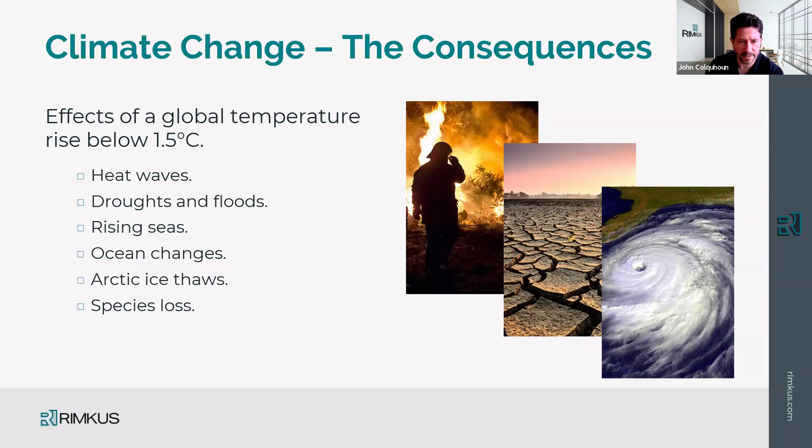Climate change and the global risks, really why we're here. We're looking at a global temperature rise below 1.5 degrees. That 1.5 we're trying to adhere to means we will still have heat waves, droughts and floods, rising seas, ocean changes, Arctic ice thaw, species loss - you name it, that's what you're talking about at 1.5 degrees. It's not that we stay where we're at currently; 1.5 is where the science says we're actually going to hit that tipping point into major events that will affect human life on Earth.

One of the main drivers to stop or slow that climate change down is that fossil fuels are to be eradicated from our supply chain - in domestic heating, industrial heating, transportation and all the rest of it. So we're moving away from that. We've all had the initiatives to go to electric vehicles, we're all looking at things like biomass plants as the sort of stuff we can do as consumers. To enable that transition, we're looking at more offshore and onshore wind, tidal and wave, biofuels, solar and PV, hydroelectric and nuclear as well - the UK announcing its small nuclear reactors last year.

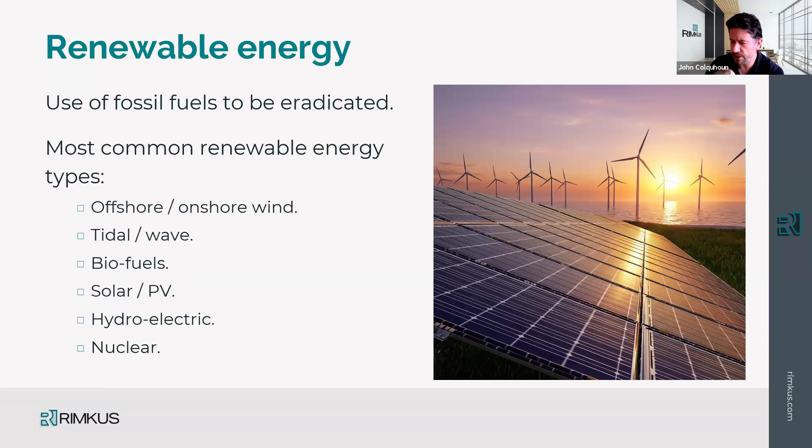Now, what actually is climate change? You're talking heat waves, you're talking expansion in power demand, both on the heat wave side and the flip to that. I don't know if any of you know that with climate change models, certainly for me in Scotland, the models say Scotland is going to get colder and damper, if that's possible. So really, it's not just a case of looking at heat waves, it's looking at how that's going to impact the environment that we live in.

Obviously, there's going to be ocean changes, so higher sea levels. So then you're looking at offshore wind turbine foundations. Do they need to cope with the greater water depths? Do they need to cope with higher winds, which then leads to higher wave conditions as well? And what do we do with those existing foundations? Do they need to be modified to future-proof those turbines across their 25, 30-year life? And if they get regenerated, can we still use those routes going forward?

Obviously, the blades and the masts as well. Again, reassessment on your wind speeds. Some of the cyclone damage that we've seen in certain regions in Asia - those turbines have been basically destroyed because we're having much more extreme events, much higher wind conditions. The problem is that's not helping with energy generation. It just means we have these one-off events that can come in and do catastrophic damage, and then the next month you have a doldrum of wind conditions.

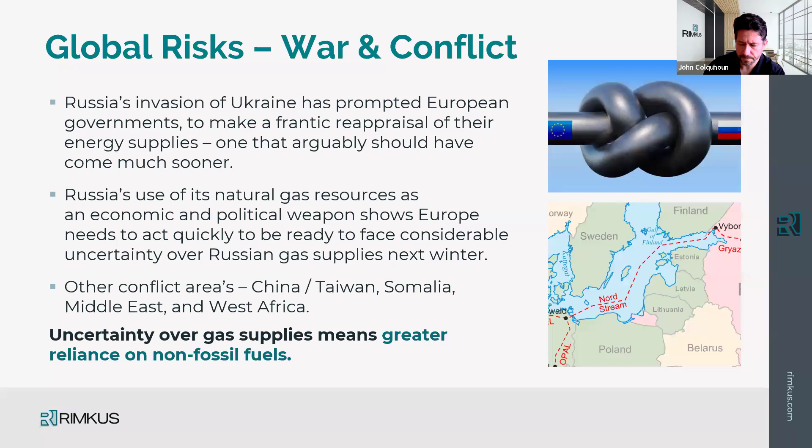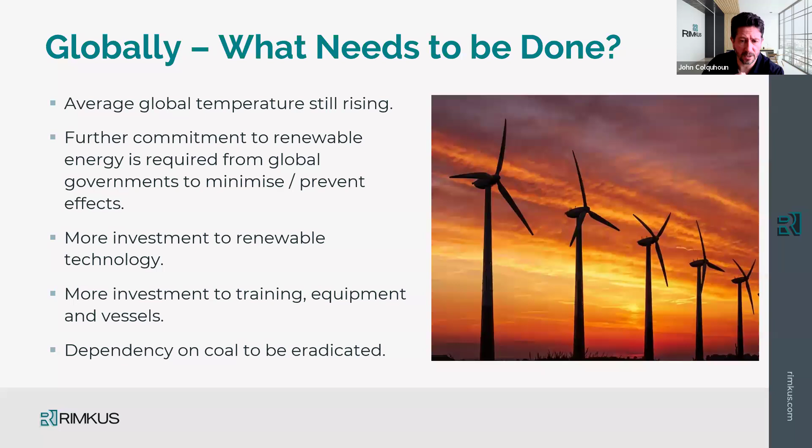Now, are the renewable energy targets realistic? I'm going to focus, since most people here are in Ireland, on what Scotland has been able to do within the framework of the UK. For example, in 2017, the UK was 7th out of 114 countries, but a major part of that is actually what Scotland's generated. Of that, it increased its renewable energy production by 26% from 2016. England increased with 14%, Wales 34%, Northern Ireland by 40% - they're coming from quite low bases. In Scotland, we've probably increased much more than that because we actually had quite a large base as it was in 2017.

Now, bearing in mind the Scottish population is a tenth of that of England, we are very lucky in that we've got a third of the landmass of Britain, which allows us to have a lot of empty spaces - let's leave it at that. What that does mean is that we predominantly rely on wind generation, whether offshore or onshore.

Solar isn't as much in Scotland, and it usually gets a bit of a laugh on this one, but actually there's terawatts worth of energy that's not being produced in Scotland because there's a natural presumption against solar and PV generation in Scotland, given our climate. But you have to remember that some of the sunniest places in the whole of the UK, probably the British Isles and in Ireland, are in Scotland, and yet there's a presumption against solar and PV installation. So that's got a lot of catching up to do within Scotland.

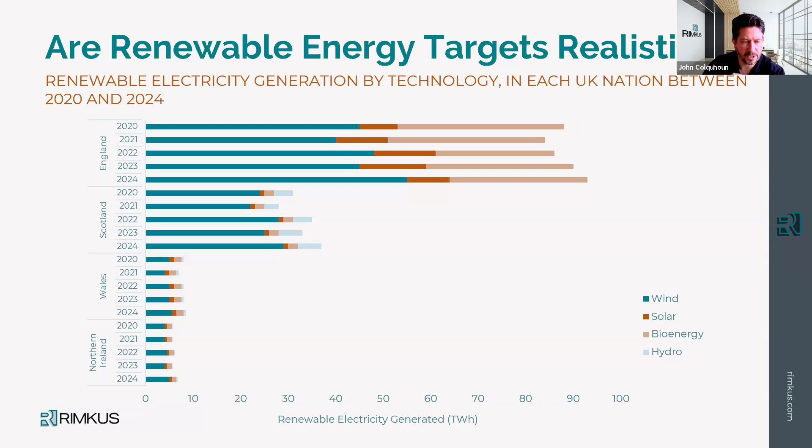We also have the luxury in Scotland of having quite a few hydro schemes as well. For example, Cruachan is one of those, and probably you'd class hydro along with wave generation and tidal generation as well, which is really three legs of the same aspect.

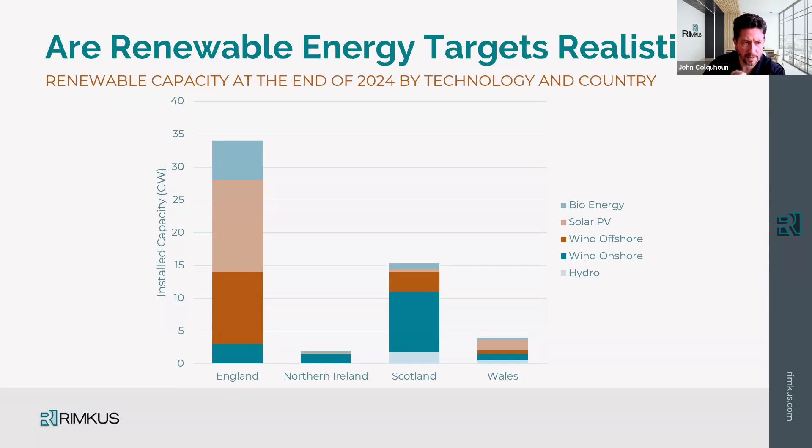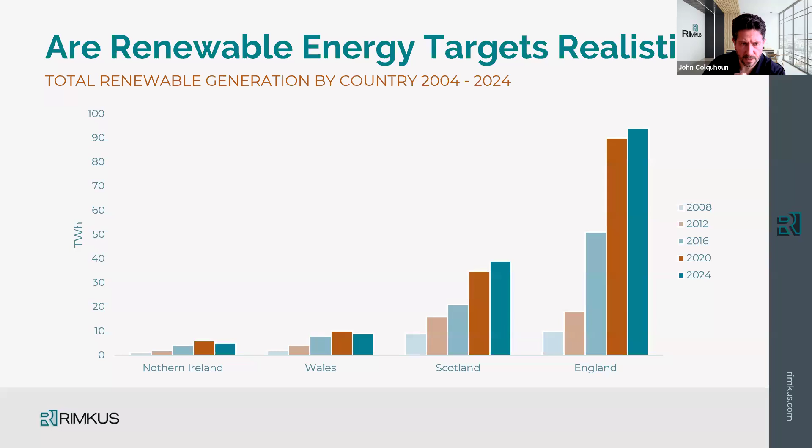Again, really just hammering home what the generation is and how it actually splits out between the years, where we've grown in the past and where we're going to. So really just a split, and probably don't see much difference here between Ireland and the British Isles.

Probably the one difference would be nuclear, which is obviously a multi-generational investment for the UK with the likes of Hinkley Point and some of the other generation we're actually doing. Those decisions should have been taken about 20 years ago, and they've really kind of lost the march on nuclear. But luckily enough, they've got a lot of wind and solar, and that's really taken up the bedrock where we've decarbonised with no more coal, and gas has been reduced slightly, but that gas production has to be reduced much further if we want to decarbonise our energy production.

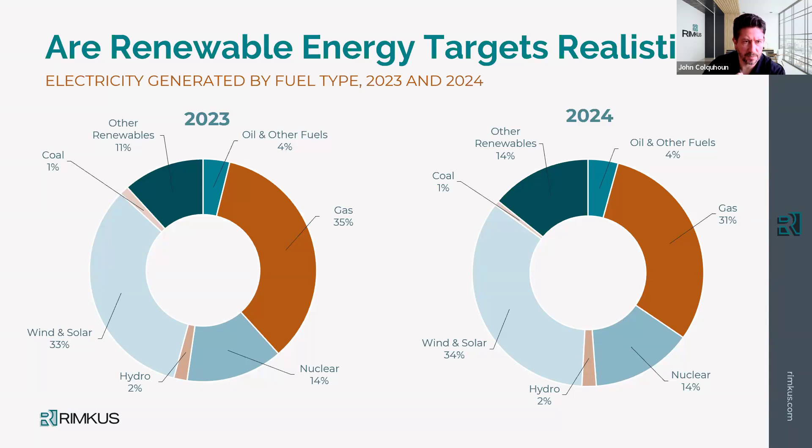So, to give you an idea, in 2000 Scotland produced 1.4 gigawatts of electricity capacity. By 2012, it was 12.3 gigawatts, so a tenfold increase in the amount of energy production.

Again, probably Ireland's very much the same. We're the bulwark for all the wind coming off the Atlantic Ocean. So I would say that probably onshore wind is going to be the major growth area within Ireland, given the next 5 or 10 years. Definitely, it has to be that.

So where that equates to is basically there's enough energy to power Scottish homes for 3 years. We overproduce our renewable energy and export that. Now, it was about 16 terawatt hours, slightly down from 2020, but again, looking back to global warming, you're looking at doldrums and some recorded low wind speeds as well. So where you have these storms that keep on coming in, they look great for generation, but sometimes or most of the time the winds are too high, the turbines shut down, so you're not actually generating any electricity through these high storm events. Then you go back into a period of doldrum after that. So again, the modelers are actually having to look back at what they're actually doing.

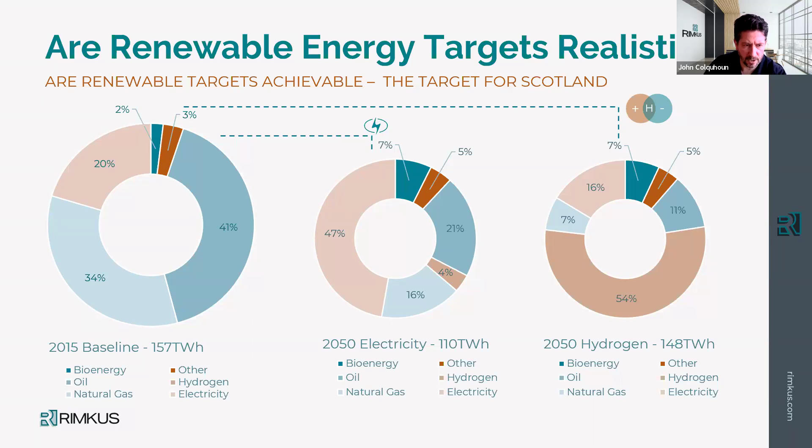So are they realistic? Well, yes, but they need the political and social will. There's a lot of pushback on things like wind turbines. If the community isn't taken along with that, again, social and political gives you the funding and it gives you the behaviour - how you interact with the community. They basically have these wind turbines in their foresight, in their mind, that they can see them, but they might not necessarily get the benefit from it.

And hydrogen, it's a bit of a phoenix - it kind of comes up and down depending on whether we can do it or not. I love the one I've seen, solar glass, which has been developed to essentially replace the windows in your house or in buildings, and it's still a PV panel or solar panel essentially in your property, but it doesn't have that visual impact of a big panel on your roof.

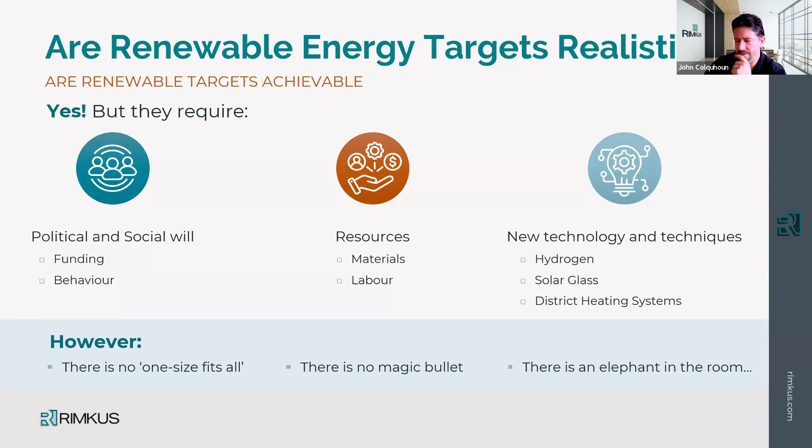But there's one I haven't talked about: is nuclear classed as a renewable energy? I've seen people trying to argue this one, and I've seen people being cute - they're calling it a low carbon energy. So they're classing everything now as low carbon rather than renewable, because nuclear material is a finite resource. We've got about 100 years left of identified uranium deposits that we know of and can harvest. So nuclear power isn't a renewable energy, but it kind of gets lumped into low carbon.

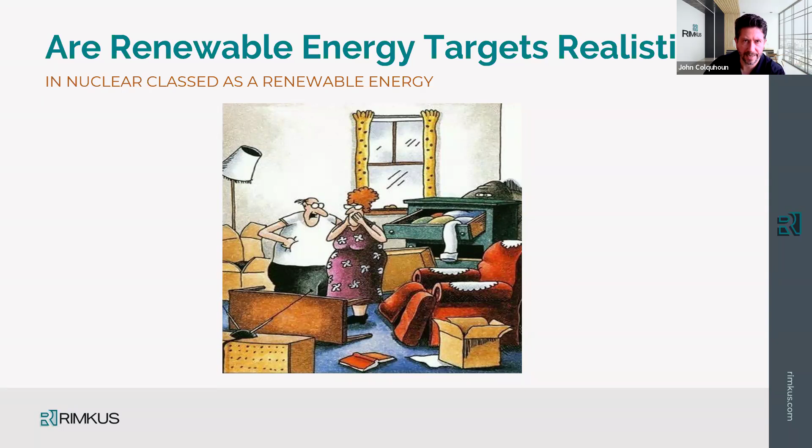And then the holy grail, which is nuclear fusion. Fusion, 40 years ago, was saying it's 40 years away. It's now about 20 years away, but they keep on going. The only thing with fusion at the moment is they can do it, it just takes more energy than it gets out. So once they crack that, that is basically the holy grail, because it's infinite energy.

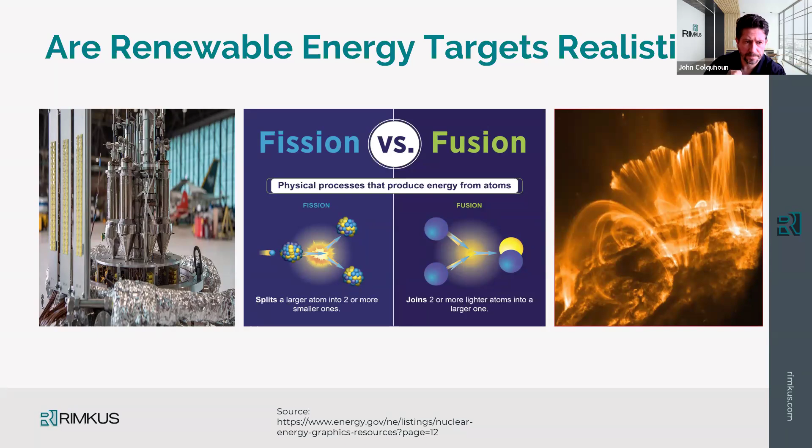So how does that affect offshore wind energy?

So wrapping all this global energy, wrapping all this supply chain, wrapping all the effects and potential going forward of what we're looking at here.

First one is obviously design practices need to change. We've got recognised standard bodies and organisations that produce codes, but I think they really have to start looking back and checking, is the 300-year storm actually a 300-year storm? Or is it now a 100-year storm? And is your 100-year storm a 10-year storm? There's that constant evaluation of what wind speeds, what wave heights, and any of the other aspects we're looking at. I think it really has to be reevaluated.

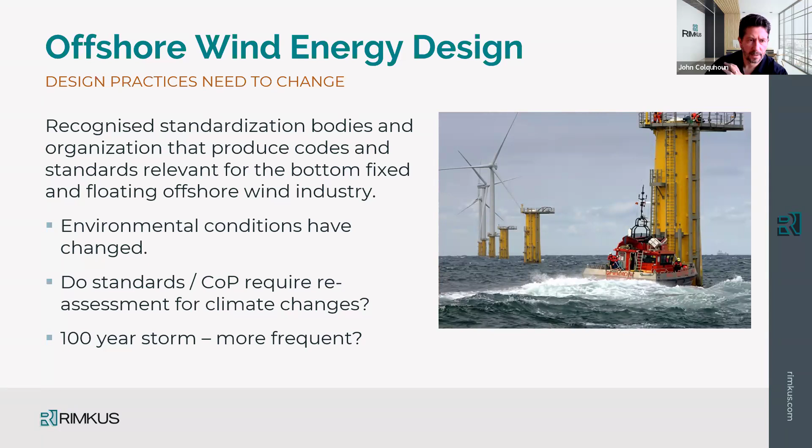Layouts - do we lay out the wind farm, the turbines, so that we can withstand the windstorm? You're talking here, we're looking at 20, 25 years. Beyond that, even if we repower them, is the site location the best location if we're looking over that length of period?

Are we looking at turbines? We're now going to 15 megawatt turbines. They are huge. You might need less turbines, but every time one turbine goes down, it's a much bigger hit on your generation and power produced. So you're putting more eggs into the same basket. Is that the best idea, or is it better having smaller turbines but more of them? Again, it goes back to what suits your environment, what suits what you're actually wanting to do. No size fits all.

And then you're looking at how do you build them. What's the power? What's the thrust from it? What's the rating? What do you do to control it? How do you shut it down? Do you get the most out of it? Can you operate these wind turbines at higher wind speeds? Do they actually operate at lower wind speeds as well? Those doldrums that occur - are we getting better at actually capturing all that wind, all that energy, at the same time?

Now you're looking at the content of materials. I've seen some ideas of the materials for the blades changing back to wood - they used to be made out of balsa. Going back to older materials to see whether we can have a look at those, because it might not necessarily be best for the environment using GRP. But then somebody comes along and fixes that, saying we've got a product here that we can repurpose and reuse. Do you have the blades leading the nacelle or behind the nacelle, depending on which way it turns into the wind conditions? All these sort of things are driving the design and driving innovations that we really need to be looking at now for that 20 to 30 year resilience.

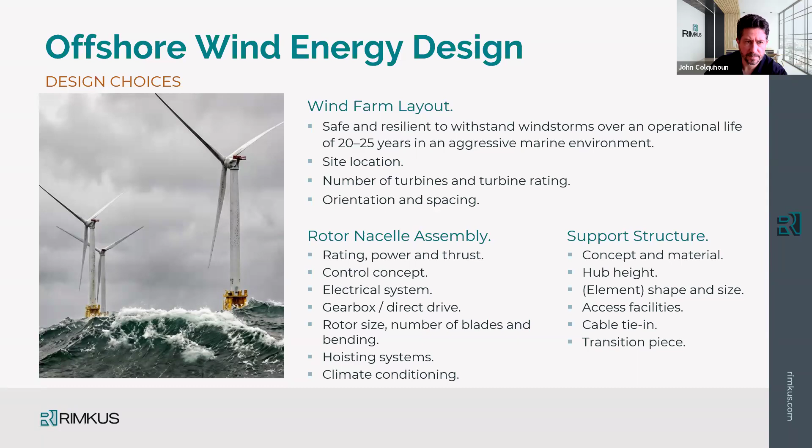Some of the biggest and probably most costly failures we've seen are damage to undersea cables. So you're looking at scour protection, the concept and materials you're using, the shapes and sizes of what you're actually doing. The structures, the met masts - do these affect other aspects of your wind farm? What routes for undersea cables might have made sense 5 years ago? Do we have to reassess those on shifting sands and the seabed? Are we looking at AC or DC generation depending on which type of wind turbine and how far it is? The cable protection...

How you weigh them down. Do you have to worry about terrorism? Do you have to worry about state-sponsored terrorism? Or is it just a case of cable dragging from vessels, normal vessels or fishing vessels, things like that as well that could potentially damage cables? How do we look at those and how do we minimize those?

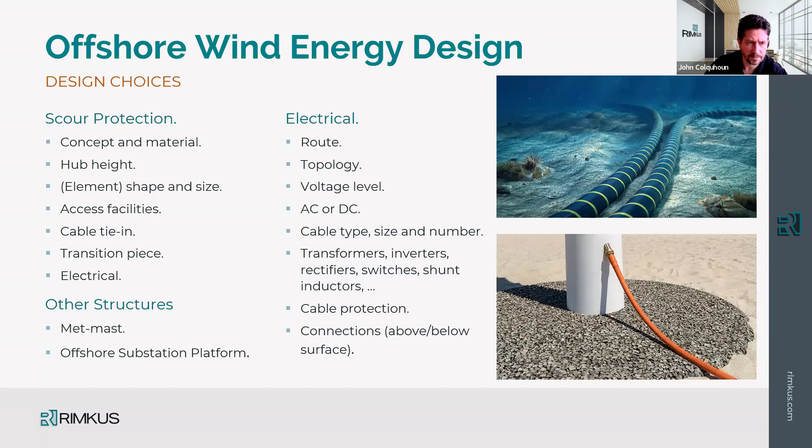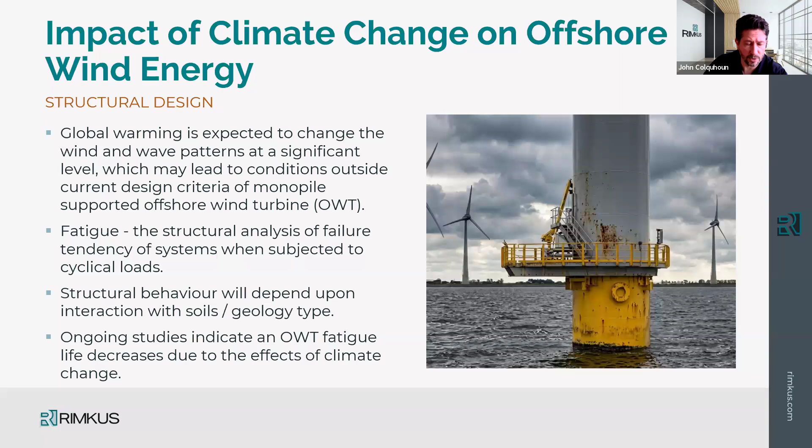Again, do you need to actually increase your PPM, your visits to site, your assessments? When you're ultrasounding things as well, making sure that the erosion or corrosion you've actually got is in line with what you expect.

But what we find, looking at it, the models are suggesting that wind speeds will decrease as a result of climate change. But the converse flip to that is it will increase extreme weather events. There's also going to be changes in wind patterns and tidal patterns, and a rise in sea levels.

One of the ones I look at is the Labrador conveyor. If you dump a whole lot of fresh water into the top of the Labrador conveyor, it essentially switches that off. That then potentially affects the Gulf Stream, which warms up Ireland and Scotland primarily in the colder weather. So is that going to affect and increase our conditions so we get colder, wetter, snowier conditions? Do they have to be accounted for in the potential case that happens, which, believe it or not, has happened in the past?

That's why we think of Charles Dickens and a white Christmas, basically A Christmas Carol - that was at a time when they think there was a slight hiccup in either the Gulf Stream or the Labrador conveyor, which resulted in a mini kind of ice age in the UK. That's how we get all these preconceptions, but it has happened in the past.

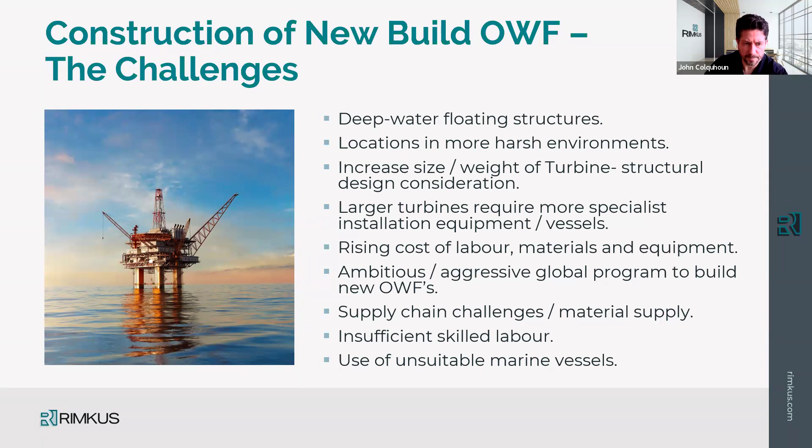We also have quite a lot of wind turbines reaching the end of their 20 to 30 year lifespan. We've extended some, we've rebladed them, and we're still going through that process. There was a wind farm, a couple of years ago, that underwent regeneration in Scotland - an onshore wind farm. Essentially, we're able to do much more generation through fewer turbines now. These are considerations that are out there as well.

The other one I'd mention is, if you have a wind turbine that fails and has to be replaced, getting a direct replacement can be near impossible. What used to be a standard 5 megawatt turbine, you can't get for love nor money now. The smallest you might be able to get is an 8 megawatt, but the problem is that for planning purposes, that's a material change to the size of the turbine. Therefore you might have to go back through all your planning consent with communities, etc. So that's a major consideration - whether you can actually renew or replace that turbine, or what can be done with it. Do you have to write off the financial input of that turbine on the wind farm, because that's less expensive than trying to work out how to replace it?

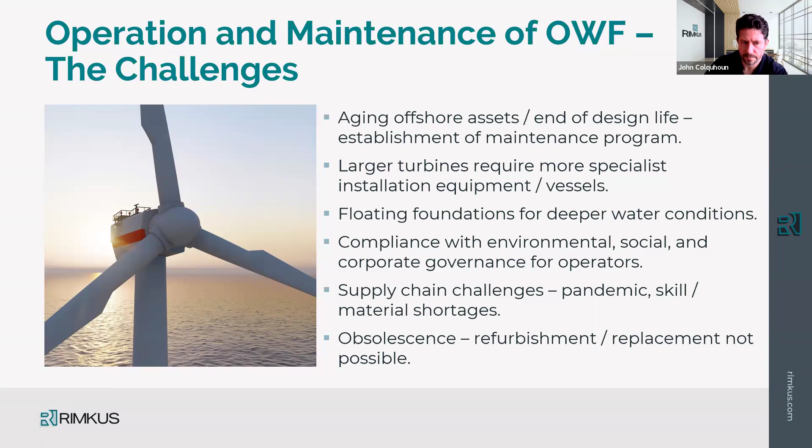We're also probably looking at more defective manufacture claims, because a lot of these wind turbines are pushing the boundaries. For example, when you bring a new wind turbine blade into manufacture, there might be maybe 5 prototype blades, and of those, possibly only one has gone through full failure analysis. So you're building a fleet of wind turbines with blades on the basis that you've tested just one blade. That's the approach being taken, and it has worked in the past - I'm not saying it won't work in the future, but sometimes there's design in there that might require complete design changes, and we're only really finding that out when they actually fail in the field.

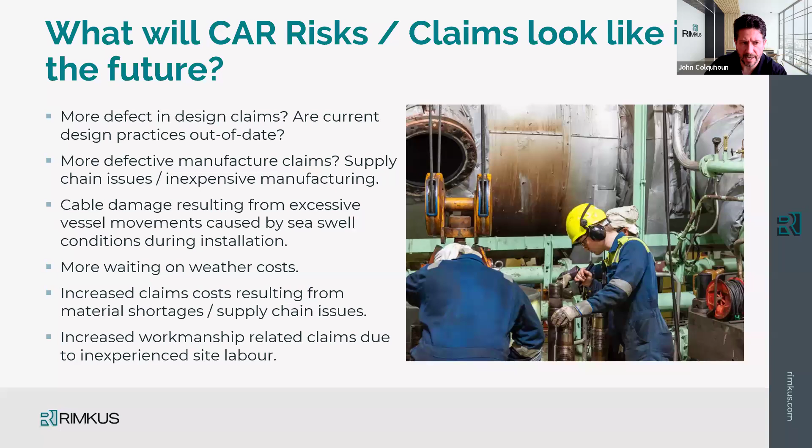And probably increased workmanship issues as well, going back to redo PPM work or any other maintenance or refurbishment works. Are we losing that skill set? Are we making sure the skill set is there? Is the training in place for that labour to actually do the work properly? Because it's a very expensive failure to go back and redo, especially when you're talking about specialist vessels, to actually minimise those losses - so get it right, get it right first time.

So looking to the future, I think we're probably going to be looking at failure cable protection systems, again with seabed movements, higher vessel turnaround, and other factors - things like sabotage is another one. There's a whole issue around certain fleets and vessels operating in international waters, where there's a potential, or very high confidence rate, that those vessels are bad actors.

Some of the ones you've seen as well is with the higher tidal movements and higher sea levels, we've got unburial of subsea cables, again excessive movement and damage.

Vessel impact - there's obviously the ones where if you've got vessel to turbine transfers, there's always the possibility a vessel can strike a wind turbine. I heard of one where there was a vessel that went on autopilot, nobody was in the bridge, and essentially it almost sailed right through a wind farm. It only really struck the wind turbine at the far end of the farm just through sheer luck. That's the sort of thing that could potentially happen.

Obviously we're seeing maybe a bit more of an uptick in manufacturing claims and design defects as well. I think really that's from the rush to get the product out, certain companies racing with each other to get the biggest and best turbine out. Probably a check and balance on that is making sure that as the testing is being done, are we happy with it, and make sure that the materials they're using are actually up to spec.

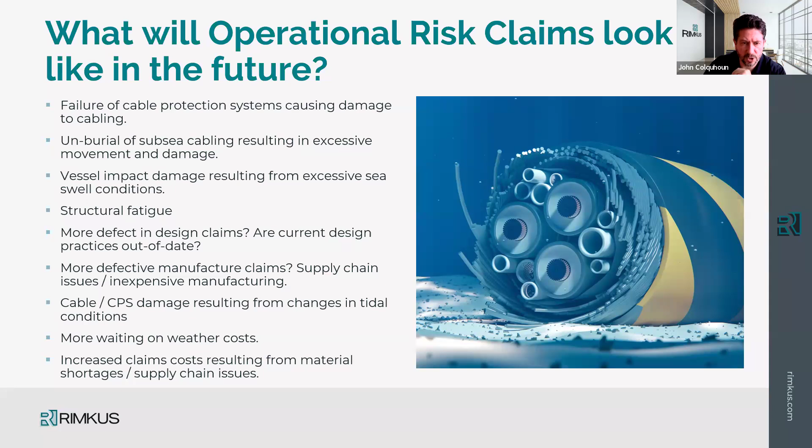Just a quick summary - really, it's climate change challenges. Whilst it's a driver for us to have wind turbines out there, I think there's a lot more challenges coming down the road around the quality and where we're at with the wind turbines, what they're actually going to be sustaining, and the longevity of it as well. Make sure that those wind turbines are actually there to produce the energy that we need, because once we sort of decarbonize our network, it's very difficult to go back, or certainly to have that redundancy in the network should wind turbines start to fail or be problems with a wind farm - how do you actually recover from that as a region, as a country, as a continent, on having mass outages?

And we're lucky in some respects that there is that interconnectability, that we can actually move energy around Europe to try and stop those blackouts. But as we saw in the Iberian Peninsula, sometimes these blackouts can occur and they can contaminate across the kind of grid network that we have in Europe. So how do we manage that? How do we work with that as well?

But obviously to do that, I think there's going to be an increased focus on the design, the installation, and really, to be honest, the maintenance of the wind turbines, because that's going to be key to making sure these turbines - especially offshore, and if we go for wave and tidal power as well - the maintenance regime on these is going to be absolutely critical given what we're actually asking them to do. And I think that sometimes, in my experience, those operation and maintenance programs are the first things to be shaved, pared back, elongated, just because it's an easy hit for companies looking to save money. But that's really a short-term win - it's going to be a long-term failure.